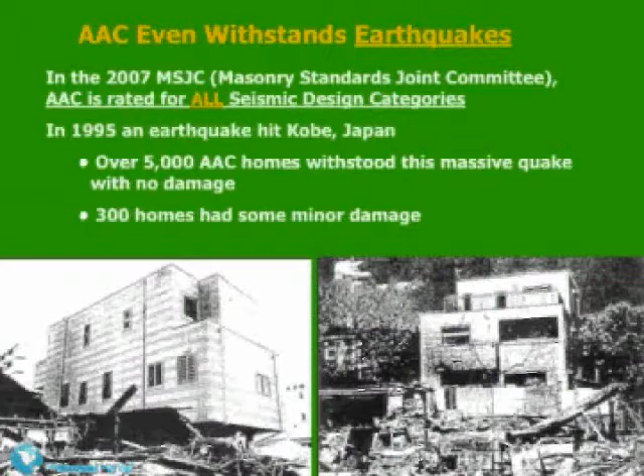In seismic areas, the low unit weight with a high strength ratio is an effective part to make AAC such a great structure material for those areas.

AAC is mold and mildew resistant. I think everyone has seen this kind of picture. A concrete building with one wall of drywall, full of mold and mildew. This will never happen with AAC, because AAC is a mineral-based, non-organic building material. For example, the gypsum in the drywall is non-organic too. However, the paper on the drywall is organic and creates mold and mildew.

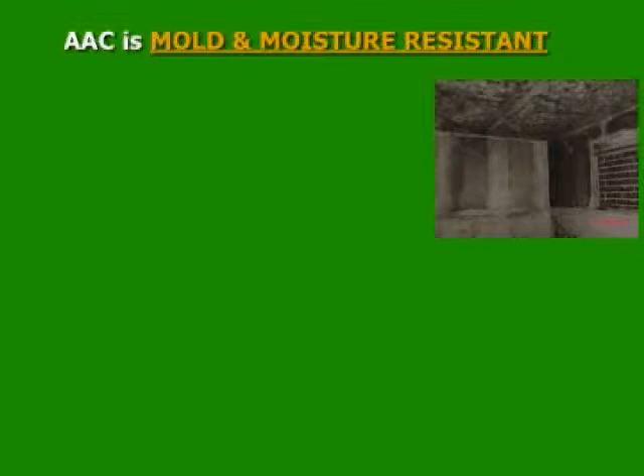So, moisture in the room, which normally occurs, cannot escape in concrete buildings. And as soon as the temperatures cool down to the dew point, either naturally or with an HVAC unit, the moisture molecules now become water droplets and start feeding organic items, like the paper on the drywall. AAC is a non-organic mineral-based material. AAC does not promote the growth of mold and mildew.

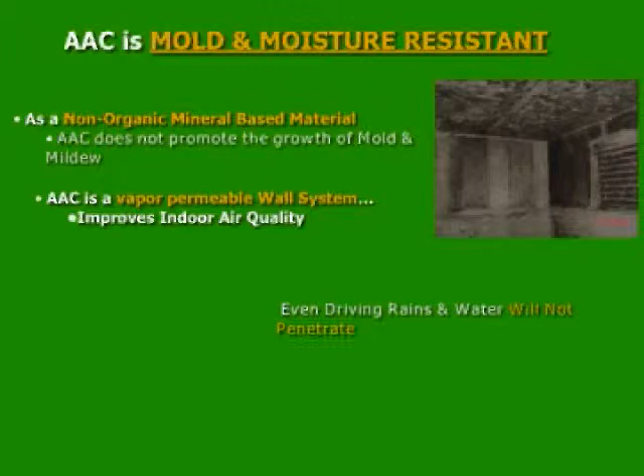AAC is a vapor-permeable system, so any moisture in the room can travel safely throughout the wall and escape, while the water droplets, which are far larger, cannot travel throughout the material. By the way, the correct moisture content in the room should be between 40 and 60%, which AAC can easily assure. This improves the indoor air quality.

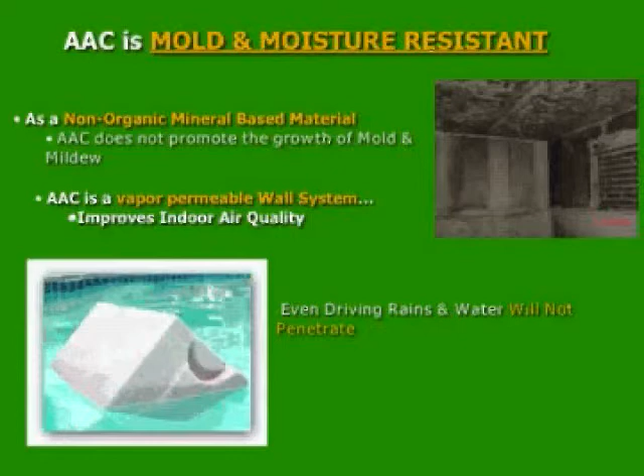Even driving rains and water will not penetrate. As you can see, AAC even floats. So if we ship AAC to an island, don't worry, your material will arrive.

AAC is pest resistant. AAC is impervious to attack by insects, rodents, and termites. Termites and ants do not eat or nest in AAC. Solid wall construction and finishes bond to the wall, leaving no cavities for insects, termites, or rodents to dwell in. So the result reduces the need for pest control and offers maximum protection against damage from pests. This is especially important in warm and moist areas.

Termites can even penetrate concrete when they know that wood is behind. However, AAC, with its large contents of quartzite, cannot be penetrated by termites. Their glands cannot digest the quartzite particles.

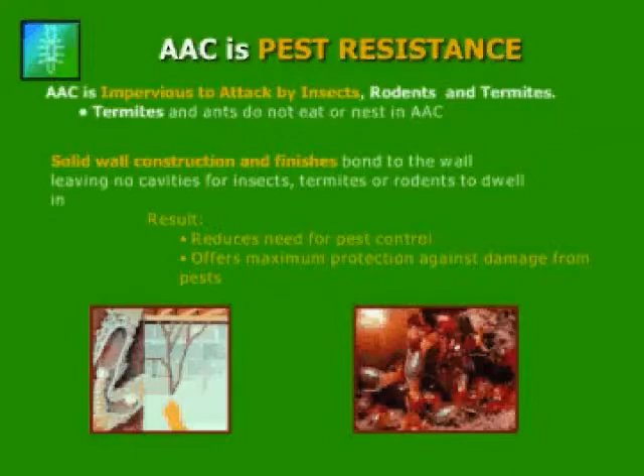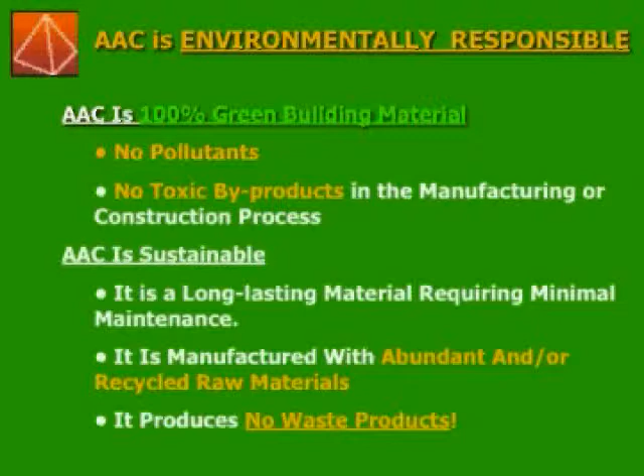AAC is environmentally responsible. AAC is a 100% green building material. There are no pollutants and no toxic byproducts in the manufacturing or construction process. AAC is also sustainable. It is a long-lasting material which requires minimal maintenance. It is manufactured with abundant and/or recycled raw materials, and it produces no waste products.

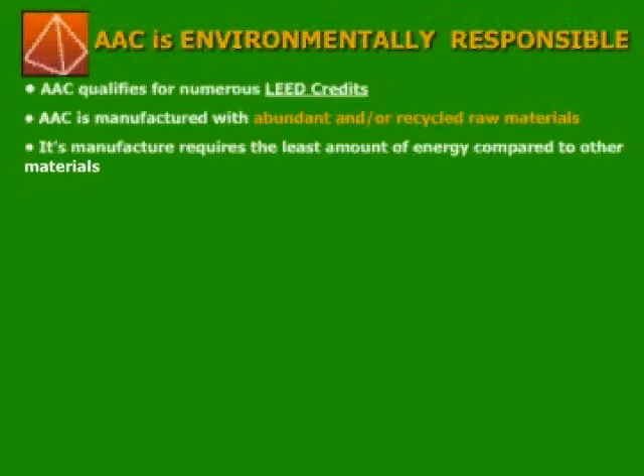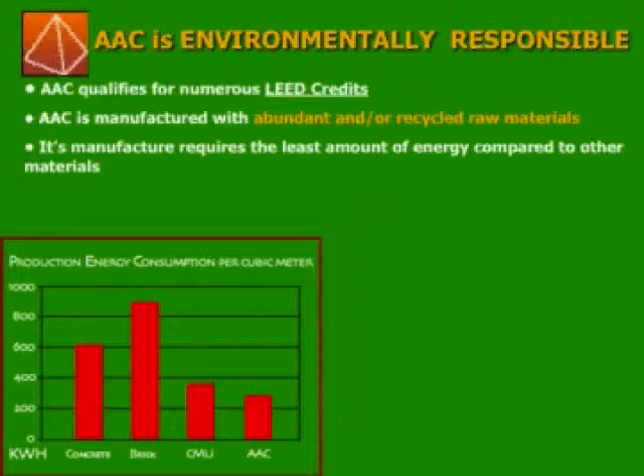AAC is environmentally responsible. AAC qualifies for numerous LEED credits, which I can explain in a couple of seconds. AAC is also manufactured with abundant and/or recycled raw material. AAC is manufactured by using the least amount of energy, as you can see on the left graph. AAC is using only 280 kilowatt hours to produce 1 cubic meter of AAC, while you need 900 kilowatt hours to produce the same volume of brick.

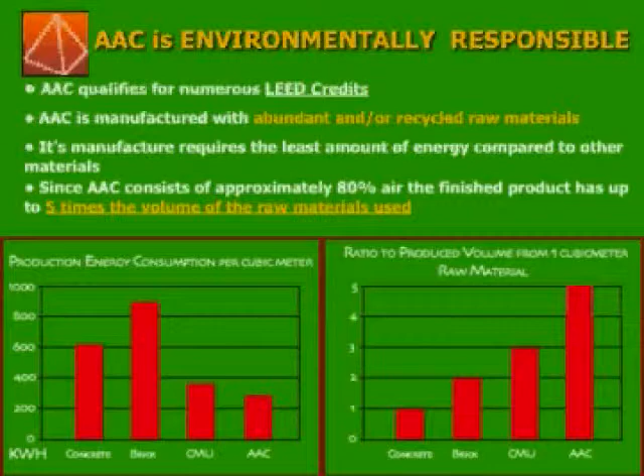Now look at the right graph. Because AAC consists of 80% air, the finished product has up to 5 times the volume of the raw material. Basically, you need only 1 cubic meter of raw material to produce 5 cubic meters of AAC, while for concrete you need 1 cubic meter of raw material to produce 1 cubic meter of concrete.

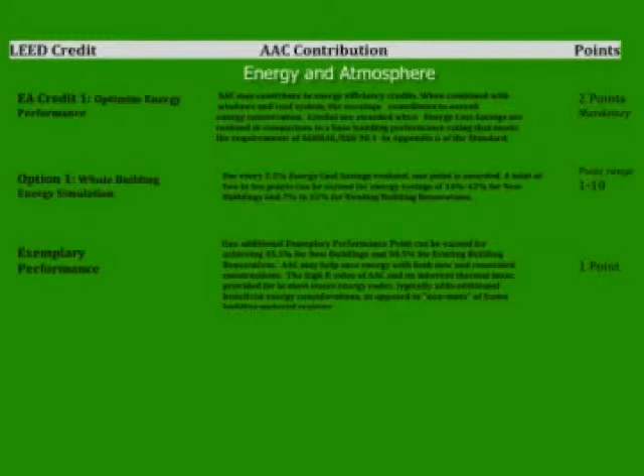Let me show you how AAC can contribute to your LEED credits. First criteria would be energy and atmosphere. When choosing the right window and door package and using an AAC shell, which includes floor and roof panels, you can achieve up to 13 points at this criteria. Next criteria is materials and resources. The great value of AAC, which is the possibility of being recycled, having the project close to an AAC plant and maintaining parts of an existing structure can contribute up to 8 points at this criteria.

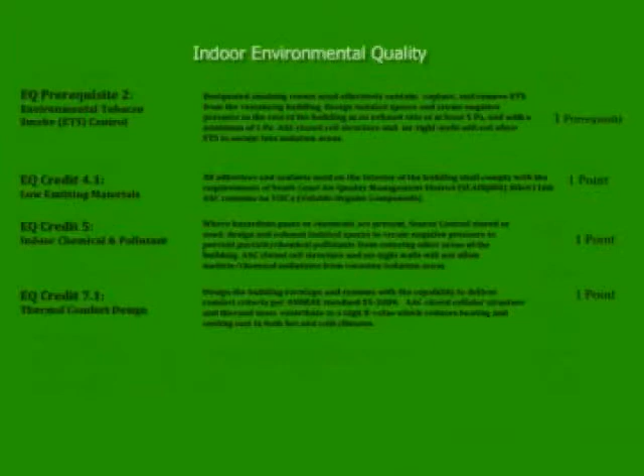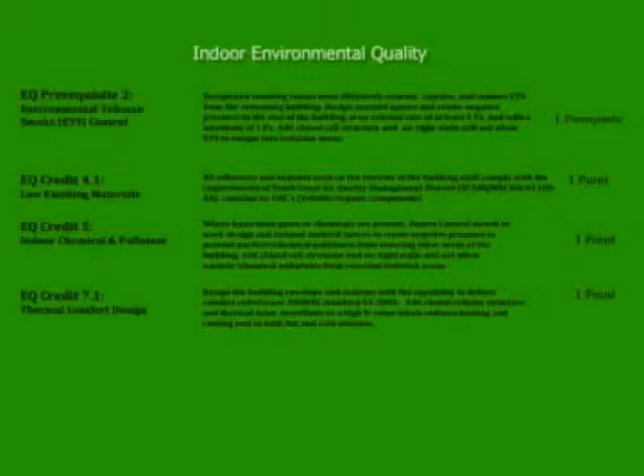So the next criteria would be indoor environmental quality. Our unique airtight properties of AAC and our high thermal properties can help you to achieve 4 points for this criteria. The next and the last one is innovation and design process. By being absolutely termite resistant, another point can be received. So overall, AAC can contribute to 1.

...prerequisite and 23 LEED credits towards green building certification. If platinum level is achieved, all fees associated with LEED credits are refunded by the USGBC, and approximately $20,000 credit back to the building owner from the USGBC.

Let me summarize all of our AAC benefits. Fire resistant: it withstands up to 12 hours at 2190 degrees Fahrenheit. Lightweight: AAC is 5 times lighter than concrete. Energy efficient: AAC has the highest thermal rating in the industry for its mass, up to R30. Absorb sound: virtually soundproof interior rooms and to the outside.

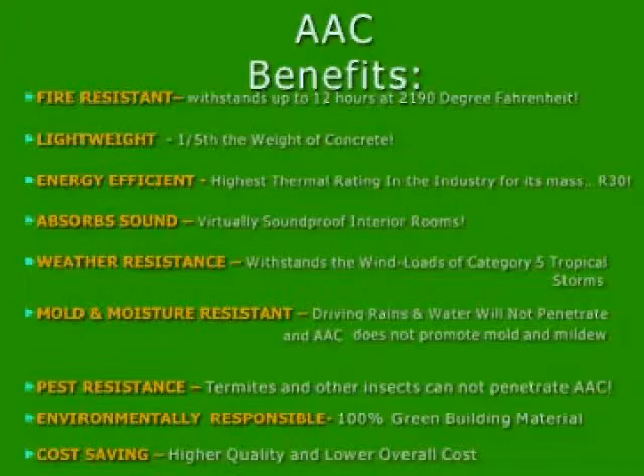Weather resistant: AAC withstands the wind load of Category 5 tropical storms. Mold and moisture resistant: driving rains and water will not penetrate, and AAC does not promote mold and mildew. Pest resistant: termites and other insects cannot penetrate AAC. Environmentally responsible: AAC is a true 100% green building material. Cost saving: higher quality and lower overall cost.

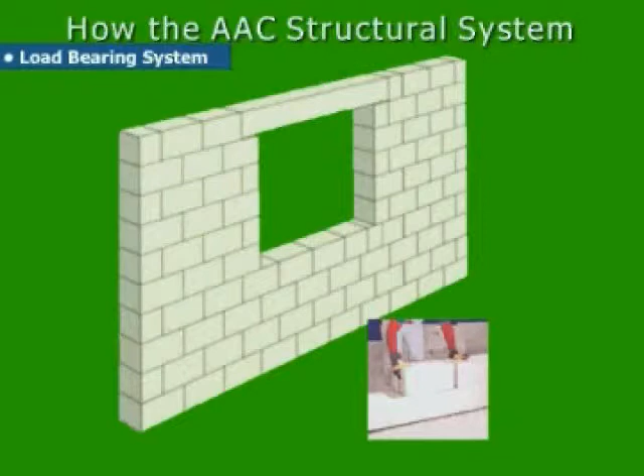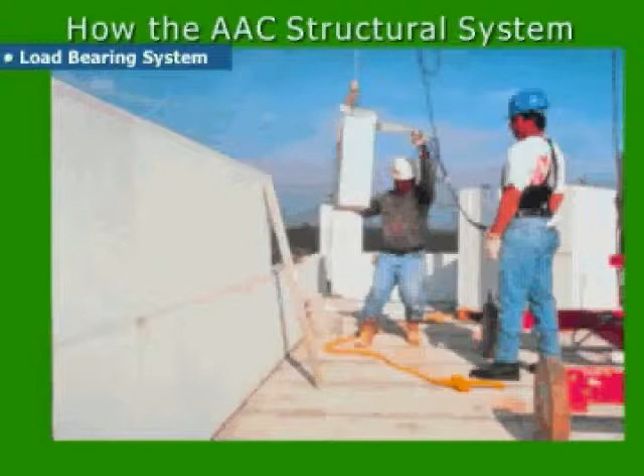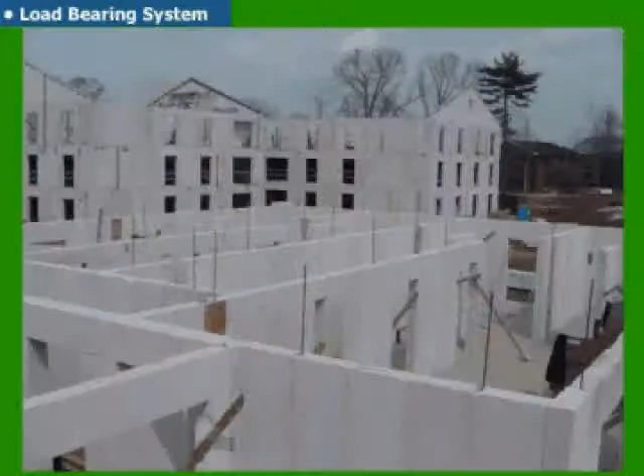So how does our structural system work? We can use standard blocks in sizes of 24-inch long and 8-inch high and thicknesses in 2-inch increments, so 2-inch, 4-inch, 6-inch, 8-inch, 10-inch and 12-inch thick. Or we can use jumbo blocks, which are 2 feet long and 2 feet high and have the same available thicknesses. Or we use load-bearing panels with a maximum height of 20 feet and a standard maximum width of 2 feet, which have the same available thicknesses as our blocks.

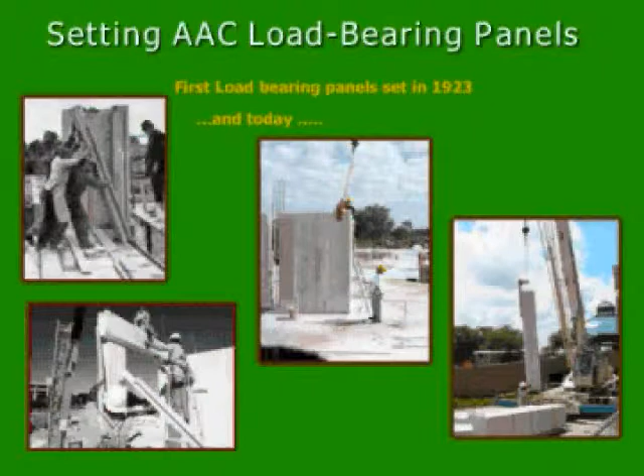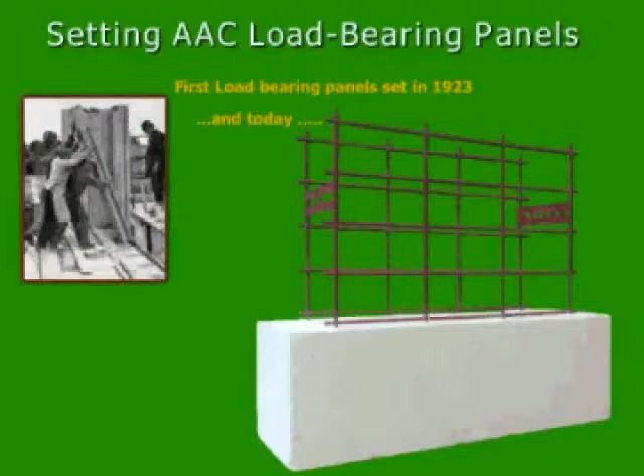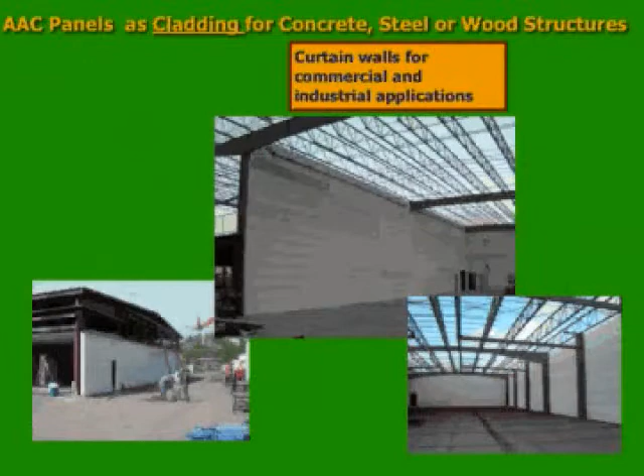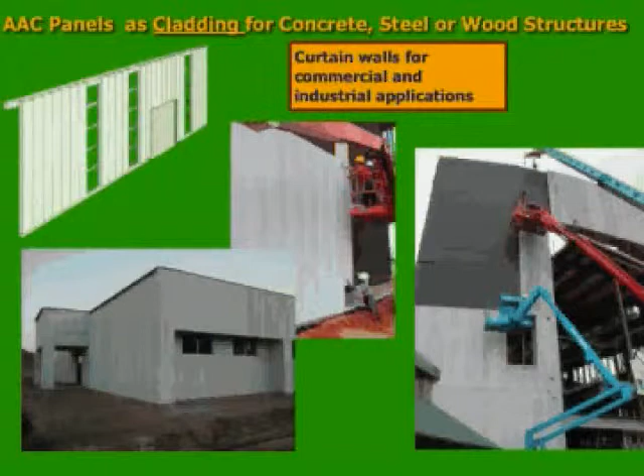AAC panels as cladding for concrete, steel or wood structures. AAC panels with a maximum length of 20 feet can be used in a horizontal application for cladding of post-beam structures. If the bay span exceeds 20 feet, we use the panels in a vertical direction so that we can span from elevation to elevation beam.

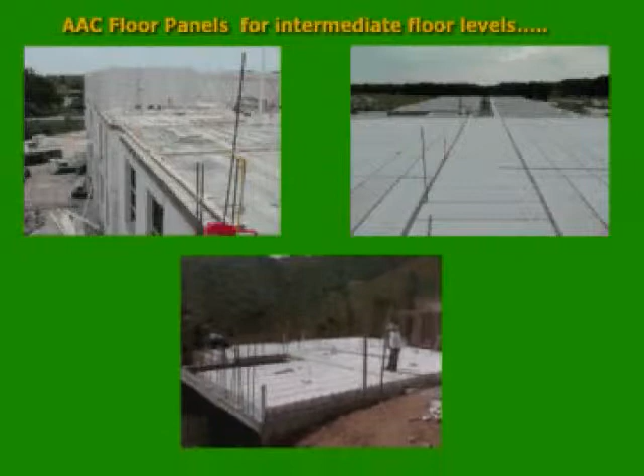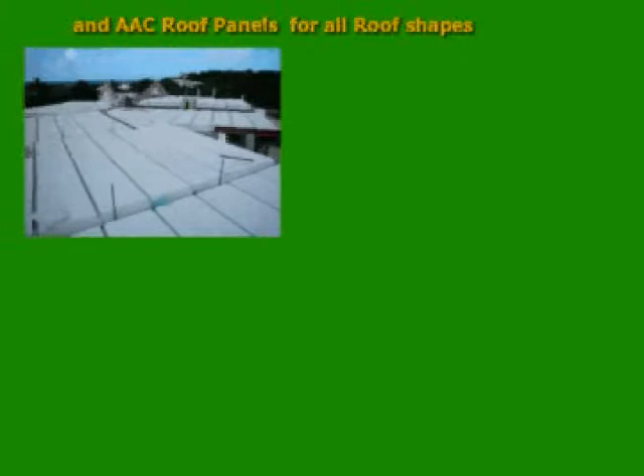AAC panels can also be used for elevated foundation slabs and for intermediate floor slabs on multi-story buildings for commercial or residential projects. AAC panels can be used for AAC roofs of all shapes. The advantage is having a full fire-rated envelope and having a roof which performs in cold areas as well as in hot areas. It is very easy to route for utilities or for architectural details, any lines or any shapes. It is easier to handle than wood.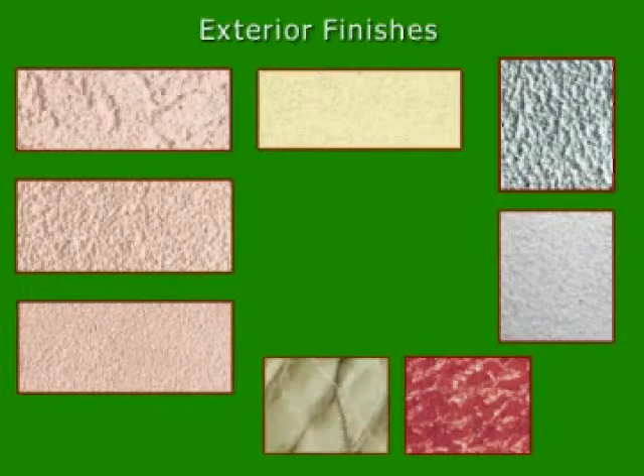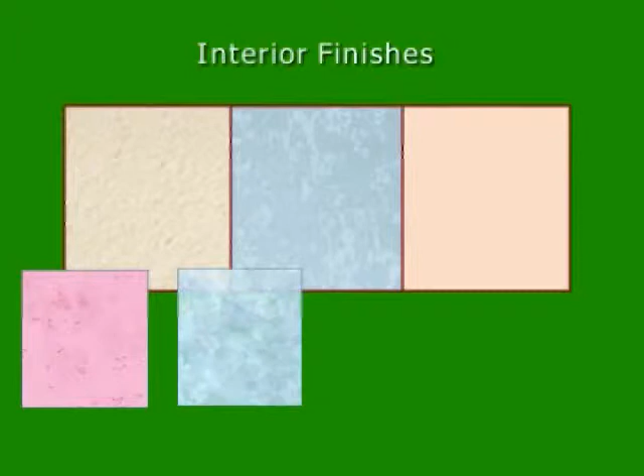Routing made easy. AAC exterior finishes are also available from MHE, in all colors, specially produced for AAC walls and ceilings with a wide variation in textures. Interior finishes are also available from MHE, also in all colors and in all styles, from smooth finish to orange peel. For special projects, we can already produce panels with a design routed into it, which will reduce the on-site labor. Those panels find their use especially for commercial or sound barrier wall projects.

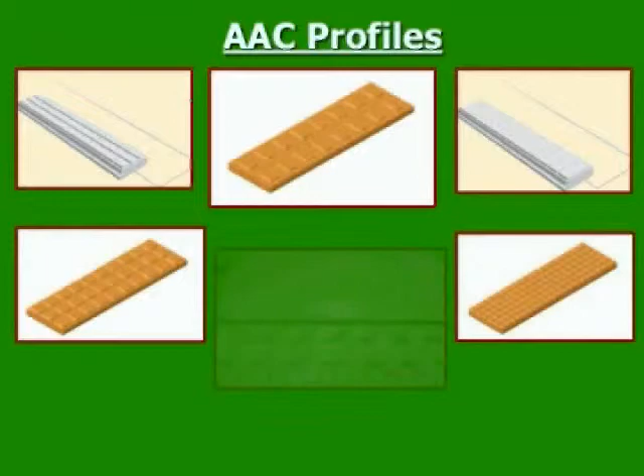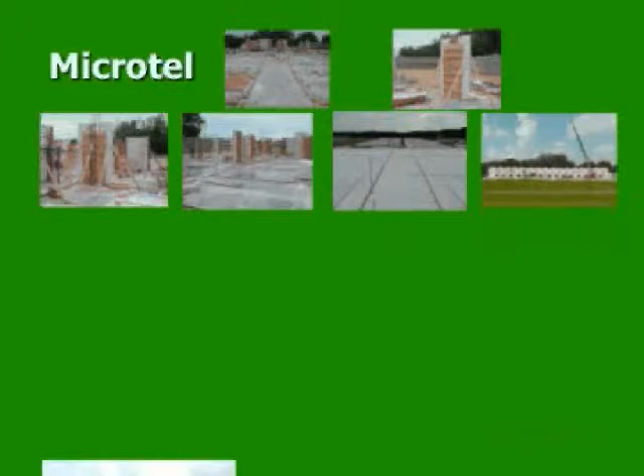Let me show you some of MHE's projects. Let's look at some hotels and motels built with AAC. AAC is one of the best shaft wall materials available. Its great fire rating, mold and mildew resistance, and its capability to release moisture made it one of the most desirable materials to build shaft walls and demising walls in high-rises.

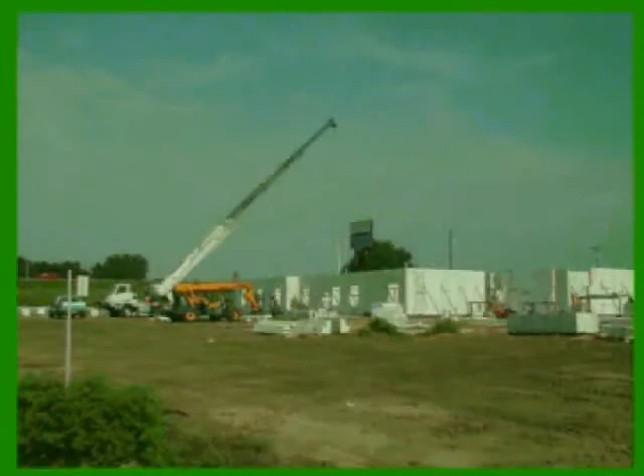This hotel was built in 45 days for Steinmetz Construction in Lady Lake, Florida. MHE, with its own general contracting division, built this hotel in Ocala, Florida in 2004 as a turnkey project. MHE was also the construction manager and finished this project...